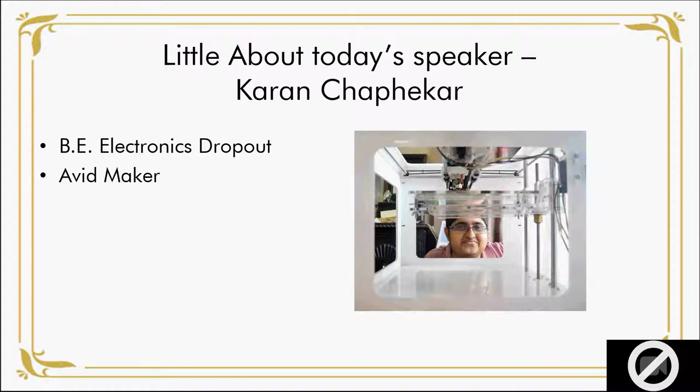A little bit about me - I tried to do my bachelor's of engineering, but I was not good at academics. So when I dropped out, I was doing these kind of projects. This is one of my printers.

So let me say what a 3D printer is. A 3D printer is an additive manufacturing method. In additive manufacturing, instead of taking a block of wood and carving it to make our object, here we are adding material to make it. And this technology is about 30 years old.

It was used by NASA also for some space shuttles. But why are we talking about it now? The reason is patents. The patents for this technology, which is FDM technology that we are going to focus on, where we put the plastic material using a mechanical system, expired in about 2009. And because of that, the project started - let's try to develop our homegrown 3D printer. So that was the concept.

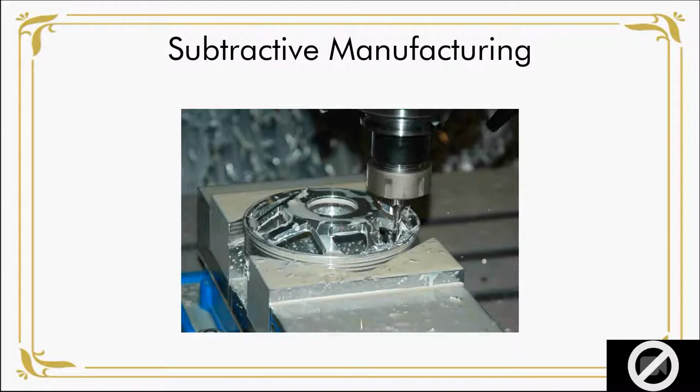So this is an example of normal manufacturing that you might know of, where you take the whole material and using a drilling machine, or what are called end mills, you try to make your part, whatever you want to make.

One more thing I want to mention is this whole project is not my invention per se - it's more that the implementation is unique for myself. This is a whole open source project. What an open source project means is the main files, whatever the software, whatever the hardware, are freely available. So you can also make your own 3D printer, because the community of 3D printing enthusiasts have come together to make this possible.

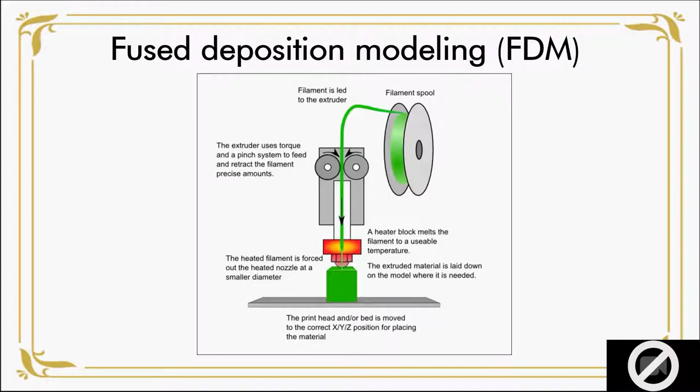So I'll just give a brief explanation of what's in an FDM 3D printer. You can see a filament spool up there. That green filament spool goes inside an extruder. An extruder is basically - if you remember the sugarcane juice, ganne ka juice, you can imagine when the cane goes in and the juice comes out - it's very similar to that. There is a heating chamber with a small hole where your melted filament comes out.

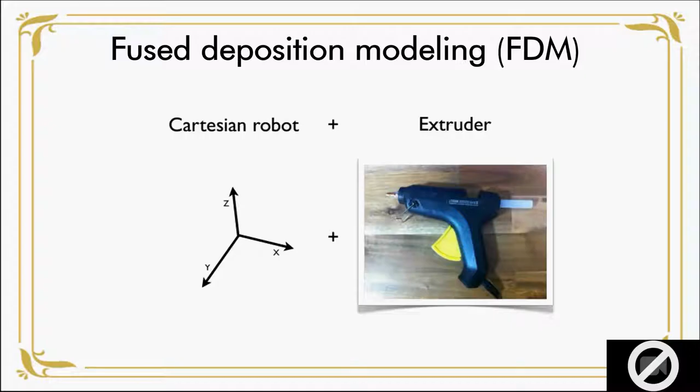The fused deposition modeling method is what we are using. We use a robot to move an object, and for the extruder, you can imagine it as a glue gun. So what we are basically doing is squirting plastic on a surface, and where the plastic is squirted is decided by our 3D printer. As one layer solidifies, we build another layer on it.

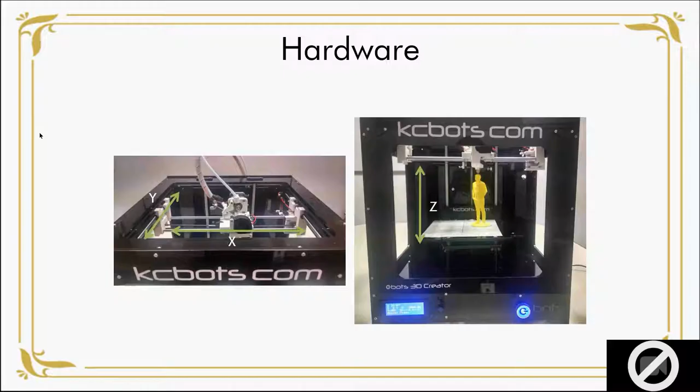So what happens? You require a 3D model to make this. A 3D model is not a photograph, you have to understand. A 3D model is made by, you can either 3D scan it, that's one technology which is not common. Another way is you just use AutoCAD-like software, and we are going to use another software called Tinkercad today to showcase it. With these systems, you can make whatever you want in 3D modeling.

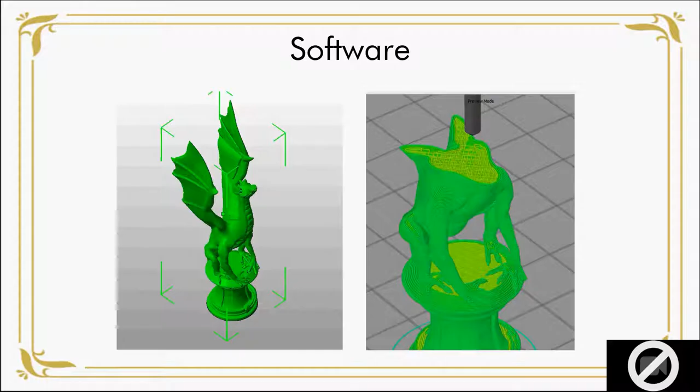It requires a little bit of skill, but once you are done with that 3D model, the software developed for this 3D printer can just take that model and recreate it with, I would say, 0.2 mm accuracy on the 3D printer. So what you saw on the left is the 3D model. On the right is what the software came out with. The software decided where to put the plastic, how to put the plastic, and after that you have this 3D print, which is the object that was designed before.

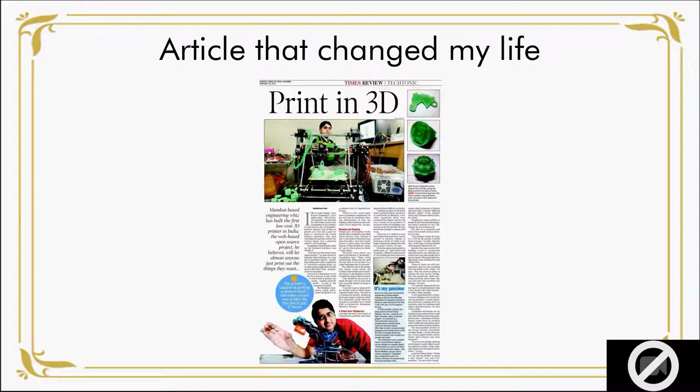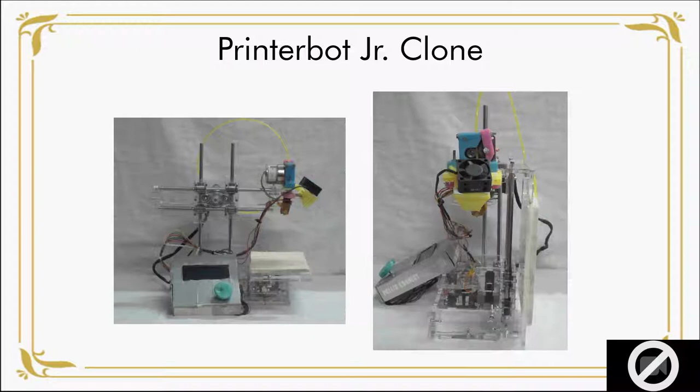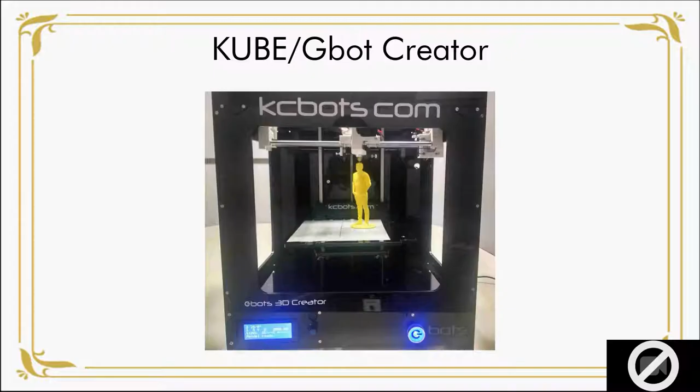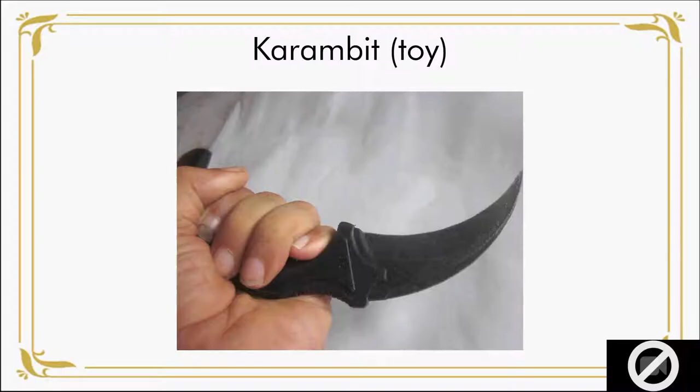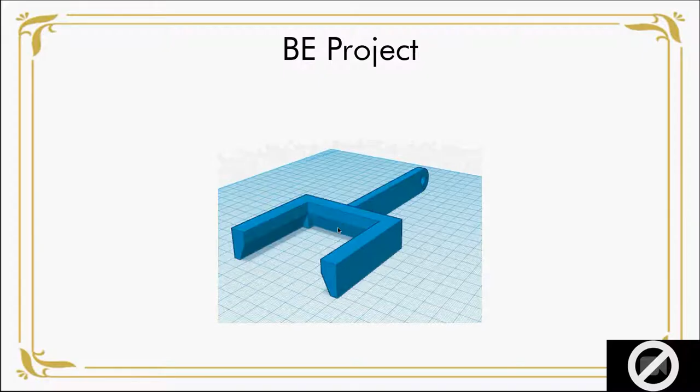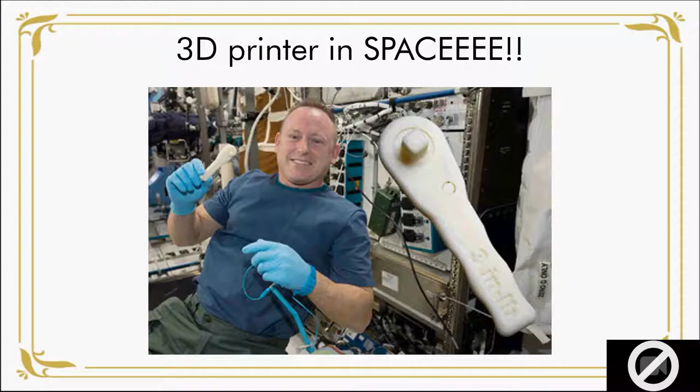One more advantage of 3D printing is you have to carry only the raw material. Imagine if you want to make a spanner for a specific specification. You would have to carry every spanner because you don't know what you will need. But with a 3D printer, I can just take a piece of plastic and print it wherever I want. So this is actually a wrench made in the International Space Station with a 3D printer. So the technology is very versatile.

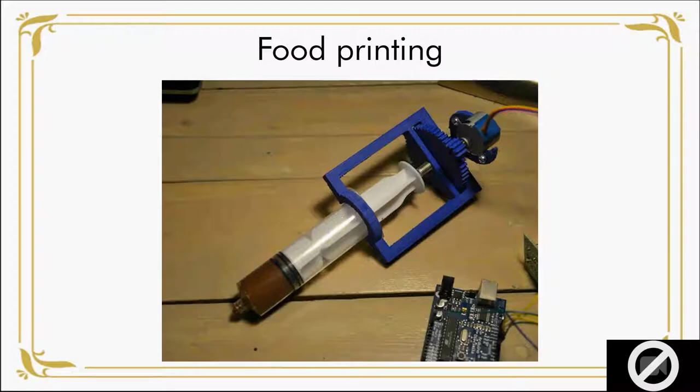So now with 3D printing we can extrude plastic, but we can extrude other materials also. So this is an example where chocolate is inside the syringe, and it is used to make a chocolate 3D print. So you can make a small toffee or chocolate in whatever shape you want, completely customizable. You can imagine these things in 5-star restaurants where you want something very customized, or high-end cafes.

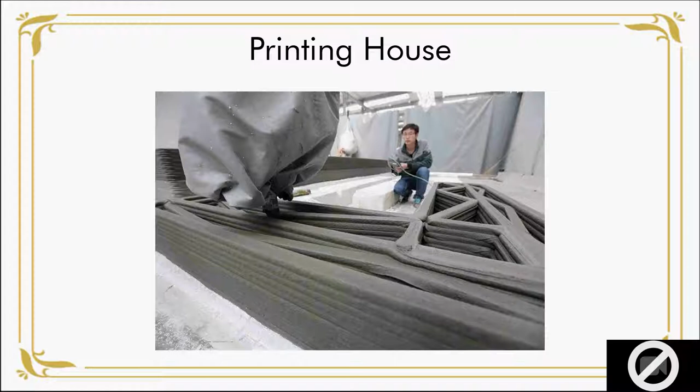This is another thing. They are 3D printing houses also in China. So this is a 3D printer which is depositing concrete layer by layer and making these houses in 24 hours. So you can imagine how fast you can do 3D printing even at large scales.

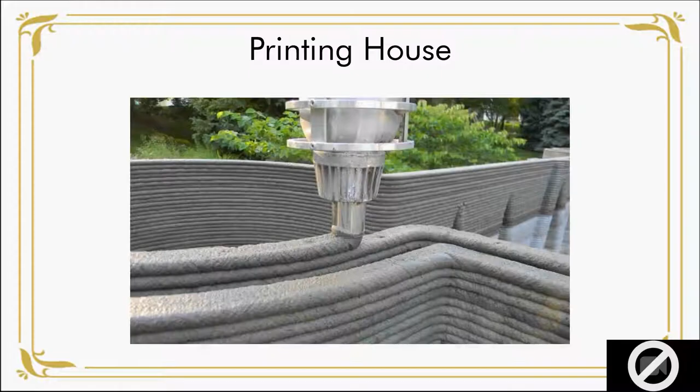This is another view. This was not in China, it was, if I'm correct, in America, and it was made by a father for his daughter, who wanted a princess castle. So he made a 3D printer which can work with concrete, and he made this castle out of it. So it's a very wonderful thing.

So for the demonstration today, we are going to go through the whole cycle of 3D printing, which starts with designing. We are going to use a website called Tinkercad. You can go and register yourself whenever you have free time. This website is basically a 3D modeling software, but you don't have to download it. It's online.

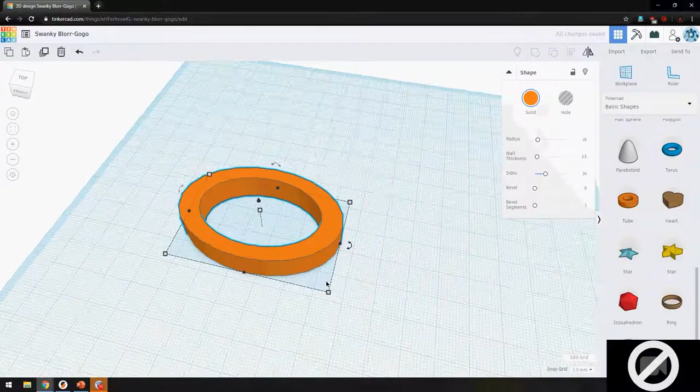On the right side you can see there are various shapes here, and you drag and drop these shapes onto this main page. You can zoom in, zoom out. You can change the size of this. You can put exactly how many millimeters you want, and you can make your objects out of this, and you can combine and subtract.

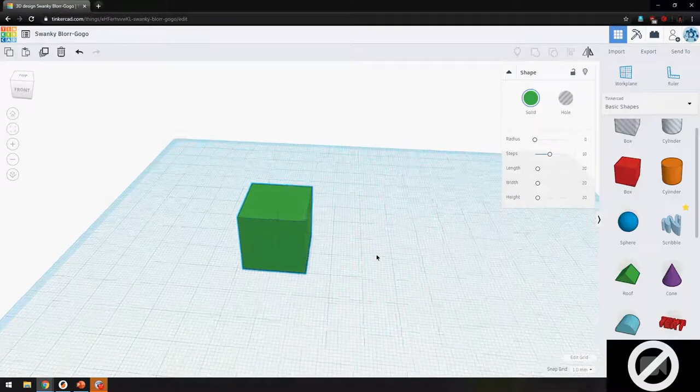So for example, I have this block. I can name it, I can color it green. The color here doesn't matter, because color is only for representation. Then imagine I want to make a small house. So this is a roof. I can keep this roof on top, select both of them, and click merge. When they are merged, they are now one piece. They are no longer separate pieces.

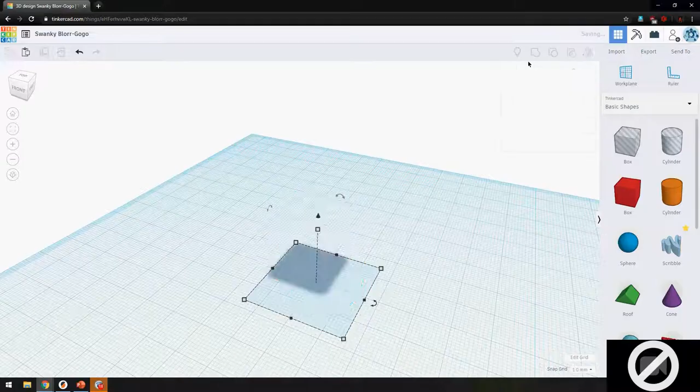Now on the other hand, we can take any other object, and as I said, I can change the color. So I can set the color as hole. Hole is, you can say, a negative. So I define it as a hole, and when I group this together, it carves the piece out from my main model.

You can see the spherical part is carved out. Okay, so using this method we are going to make a simple keychain. So what we are going to do today, we are going to take this text format. So we have this text, so we are going to type something here. So we'll write MSS.

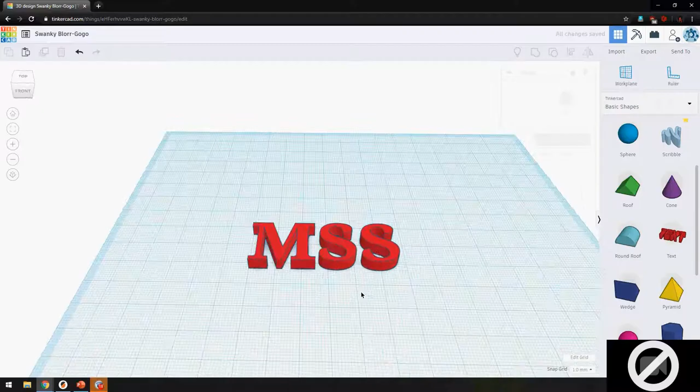And this text got its dimension, so it got a height of say 10 millimeters here, but because we want to print this model also, I'm going to decrease it to just 5 millimeters. Okay, so you can see we have made this text. Now if I go and 3D print it right away, it will create 3 letters MSS, but they are all separated. So they will be like letters used in number plates or something. So what we are going to do, we are going to take a box.

Hello, Karan? Yes? Sorry to interrupt. Actually, I think there is some lag between the screen that you are presenting and the voice. I would just request you to hold on, because right now the part where you were speaking of MSS to be printed is actually getting shown. Okay, got it. So I will go slow thoda. Thank you for feedback. And do keep checking the chat. Oh, yeah, I'm checking it actually on my phone.

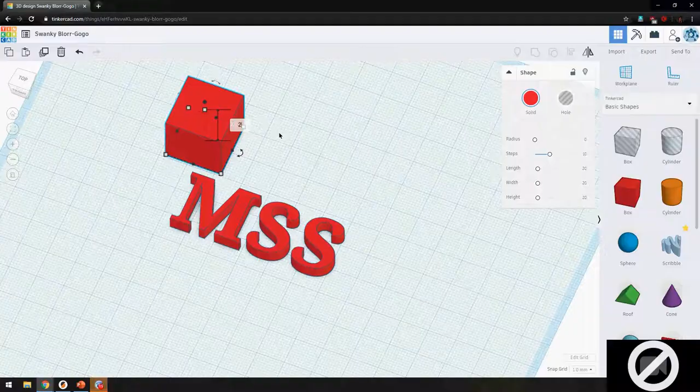Okay, so these alphabets, if I print them as it is, they will come separately. So what we are going to do, we are going to take a box. I have taken this box here, and I'm going to put the height as 2 millimeters right now. Okay, I will slow down a bit. Then let's color it differently.

Now we are going to increase the size of this box. We'll make sure that it fits this size. So if you can see it here, MSS is on this plate. Now when I print this, because of this plate, this will be more like raised lettering, or whatever is opposite to embossing.

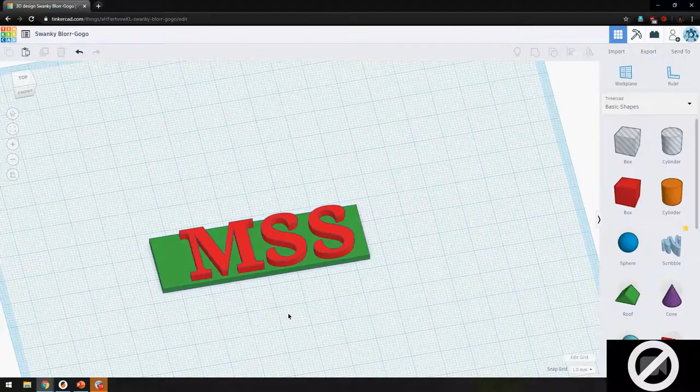As we are making this as a keychain, we require a keychain hole. So we are going to take one cylinder, and as I showed you before, as we can combine objects, we can remove them also. So I will define this cylinder as hole or negative cavity. I'm going to make it smaller.

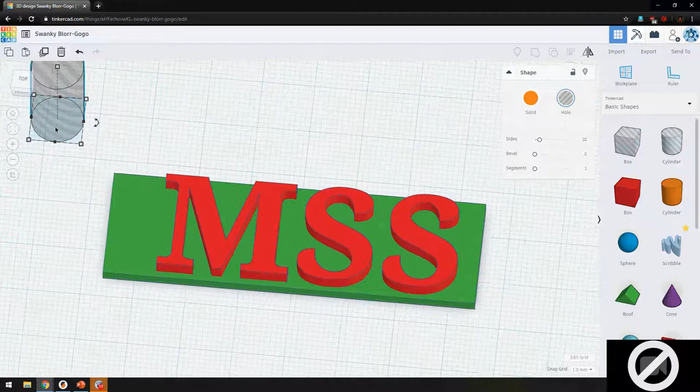Let's say 10 millimeters by 10 millimeters square. So I can type 10. I will zoom in so you can see it clearly. Now we are going to take this shape I made and put it where I want my hole. Okay.

So when I combine all of these three parts, which is our MSS lettering, the base plate, and this hole, it's going to make this into one object. But as you remember, we kept the cylinder as a hole. So it will just remove that part from my main model. So this keychain is ready. It's just a very simple design, and we are going to export it into a format called STL.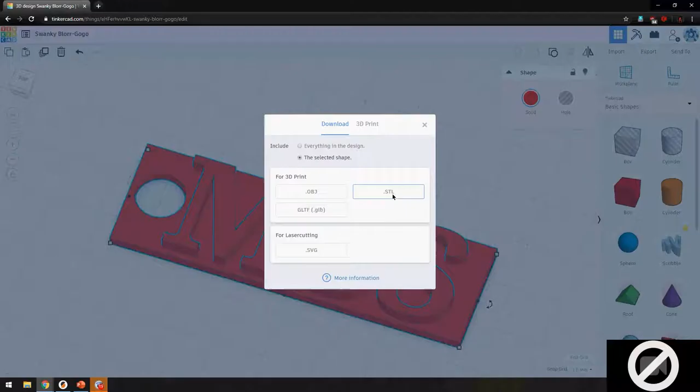So if you know Photoshop or CorelDRAW, you can export a file in a format called JPG. We are all familiar with JPG format. It is a very common format for our photographs. But once you have exported it, say from CorelDRAW, it's hard to edit it. Similar thing with the STL format: when you export it, you can't edit it easily. So I'm going to save this.

And now I'm going to introduce another software which we are going to use very briefly to convert this model so my 3D printer can understand it. These softwares are called slicers. These are specifically made for 3D printers only. What they do, they take a 3D model and convert it into a language that my machine can understand. I got a question. Yeah, you can use Blender also. We can use any 3D software. So we are going to import the file we just downloaded.

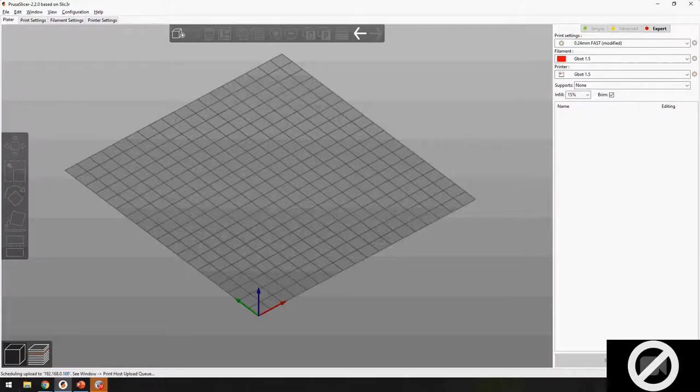You can see it here. So this square piece is the build plate of my 3D printer. So this is as big as I can make an object. There is a height limit also, but it is not shown here. So I'm going to just place this MSS in front, and there are a lot of settings involved in this. I'm not going to go in depth in the settings, but basically I select the settings.

Yeah, I will answer the questions afterwards. Okay, when we are 3D printing, I will go through the chat and maybe answer them.

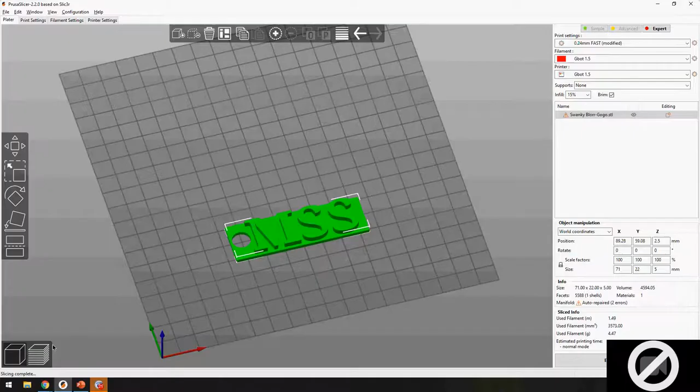So when this model is done, the software automatically slices it. The process is called slicing, and we can see the slicing view. So you can see here, if I zoom in, these orange lines are basically outlines of my object. So the 3D printer is going to draw those with molten plastic first, and then it is going to fill the red part. And if I go down, I can see how it's going to get printed.

Okay. So this is my bottom layer. This bottom layer is what attaches to my build plate. Then it goes up. So now the two layers are done. You can see this triangular pattern here.

When we are 3D printing, we don't actually print completely solid objects because it's going to be a waste of time and materials. So we tell the software that we want this percentage of fillness, or it's called infill in 3D printing terms. We have set it to 15%. So right now the object is filled by plastic 15% by volume.

As we go further, it closes our top plate and then goes for the lettering. So this whole print will be 21 layers and it is going to take 20 minutes. Now I'm going to send this file to the 3D printer. My 3D printer is attached to my Wi-Fi, so I don't have to connect it to my PC. In other 3D printers you require an SD card, but we are just going to send it to our 3D printer. Yep, it sends wirelessly and it starts 3D printing.

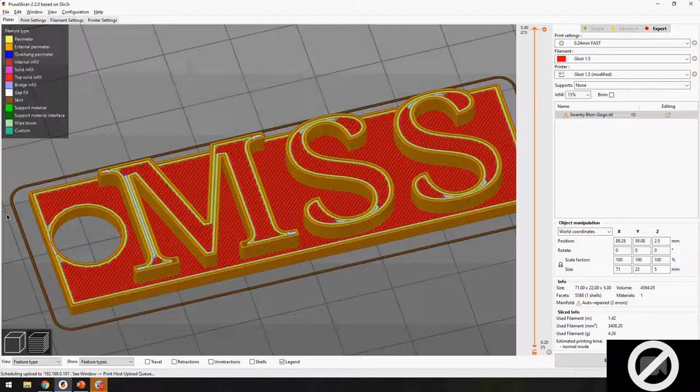Now I will show you another view where you can see my 3D printer's interface. This is something called OctoPrint. It's working on a Raspberry Pi if anybody is interested. It's basically a small computer on my 3D printer which makes its own server page, and I connect through that.

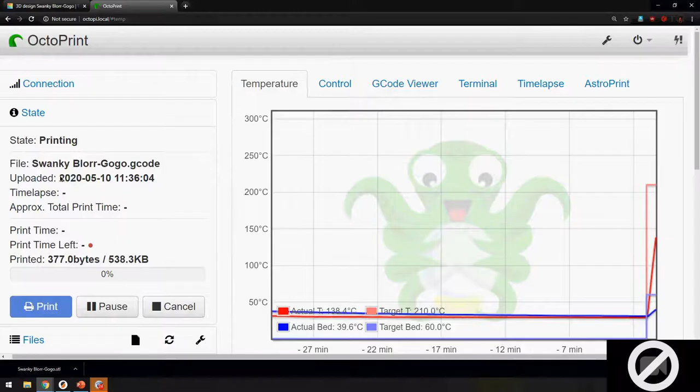So you can see here these graphs. Let's see if I can increase the size. You can see that our temperature is increasing. I told it to increase the temperature, and you can see this is the file, this is when it was uploaded, and this is the size. It's a half MB file. I can show you the G-code view.

Let me explain. This is basically a live view that shows us what is getting printed right now on the machine. After the 3D printer has started, I will move to my phone camera and show you the 3D print. Plus one more thing, I can show you right away. I attached a camera also, so I can monitor it from anywhere. It's connected to the internet, so if I'm somewhere else, I can connect to my 3D printer and see the progress. What you are looking at right now is the head of the 3D printer. Okay.

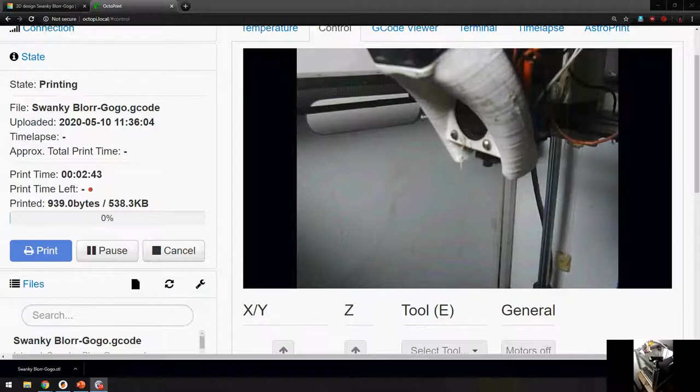Hello, Karan. Oh, sorry, I was on mute. I was saying, can I just stop the screen sharing right now, or should I? Yeah, that's what I'm asking you. Do you want to share anything on the screen while the demo is going? I don't want to anymore. Yeah, I will just stop it. If I require, I will ask you. Okay, no problem. Okay, I will stop it so they can access it properly.

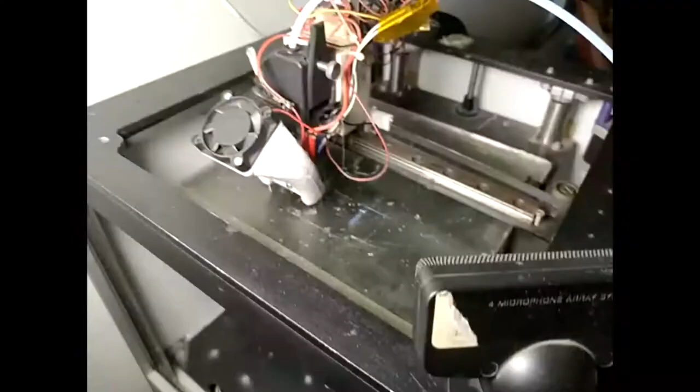So this is the 3D printer. Let me try to explain what is happening. On the back, these are two motors which are controlling this center section. So two motors in the background. What is happening right now is this bed is getting up. Now if you see, there is this filament going in. This is the plastic, so our object will be of blue color.

So this plastic is getting pulled here into this unit. This unit is then pushing it out, and right now you can see the plastic is coming out in blue color. I can show you from this angle. Wait. So you can see it's actually putting the plastic. I will keep it horizontal so it's consistent. I will keep it steady. There are a few fans also, to help the cooling of the plastic.

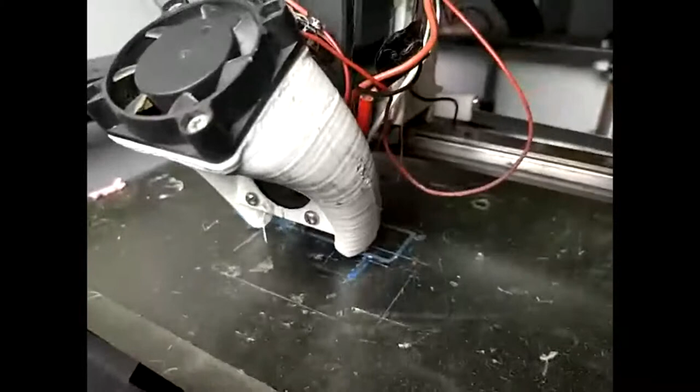The bottom layer is generally printed really slowly, because we need to make sure that it is getting stuck to the bed properly. So let me give you another overview while it's printing. As I told you, there are two motors in the back which help in the X and Y motion.

Then there is another motor which is inside this body, but is attached to this middle rod. You can see this middle rod. When it rotates, it's like a screw, and the bed goes up and down. Whenever one layer is drawn properly, the bed will go down a little, in this case about 0.24 millimeters, 240 microns, and the 3D printer will start printing on top of it.

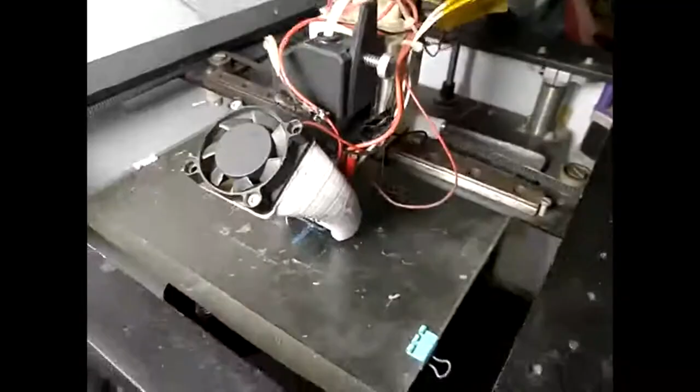Now there is another motor hidden inside this unit. This motor is doing the job of pulling our plastic. It's hard to see, but inside here there is a nozzle. This nozzle is right now heated to 200 degrees Celsius. Due to this, the plastic is getting melted and coming out of the nozzle. The nozzle's diameter is exactly 0.4 millimeters. With this information our machine will know how much plastic to extrude.

There is another fan which will turn on afterwards, like right now. So now the first layer is done, and the machine has also sped up. See, it's doing outlines first. Then it's going to start filling the inside part.

What we are going to do here is, when our base plate is done and it's time for lettering, I'm going to stop the 3D printer in the middle and change the filament to another color, so you can see the difference and how you can do multicolor printing. It's typical for a keychain. If you change it in the middle, you can see a nice contrast in the 3D print.

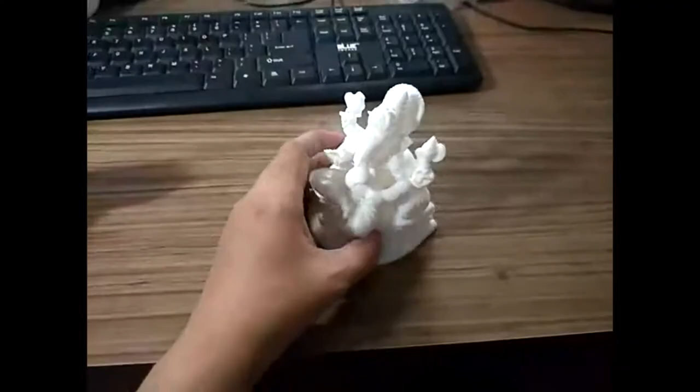Meanwhile, I would like to show some other 3D prints that I have. So this is a model of Ganpati. This was downloaded, and I think it was made by a method called photogrammetry. With this method, you take multiple photographs of an object, in this case a Ganpati Murti, and put them in a software. The software tries to understand how the model looks and converts it into a 3D model. The quality is not always good, but you can get a generalized idea.

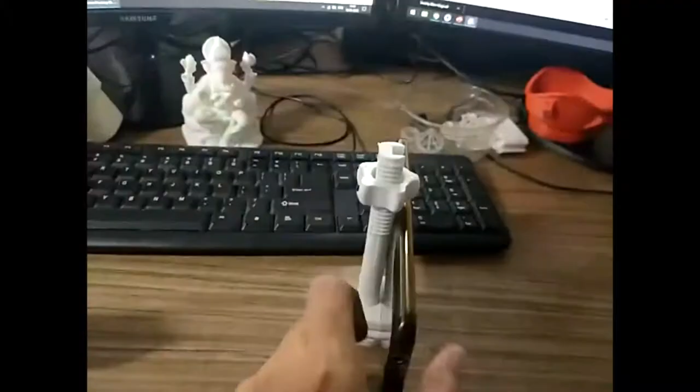Now another thing I was printing in preparation for this is basically a mobile stand for a tripod. I was printing one more part, so I could have used a phone stand instead of holding it in my hand. If you can see, there are these screws here. So this is a nut and screw.

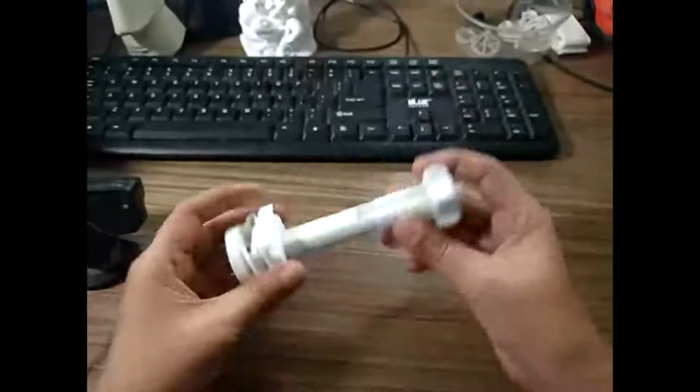So this is a nut, screw and bolt system here, and you can see how tight tolerances you can get, or how tight accuracy you can get.

This is another fun print. This is basically my glasses holder. Very simple 3D print, little fun.

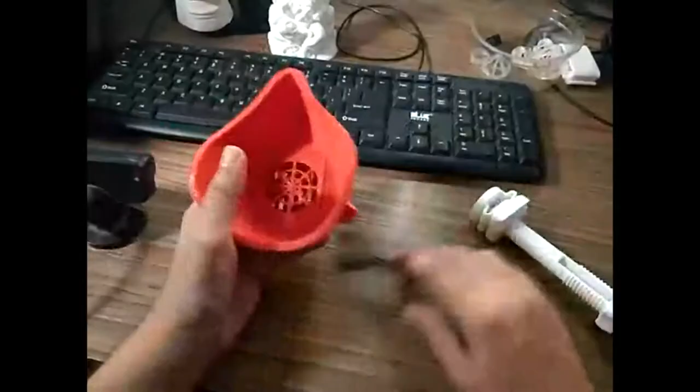So right now the corona pandemic is going on, and we are trying to make these masks so you can add filters in them, and the filter can be replaceable. This is actually an FDA approved design. So the advantage of 3D printing is I don't have to wait for a manufacturer to manufacture it, I can just make it my own on a 3D printer.

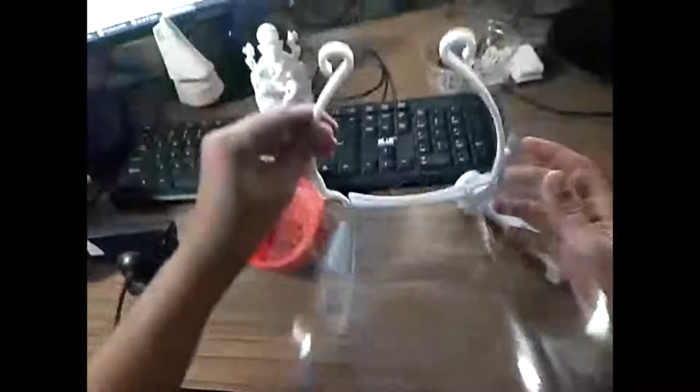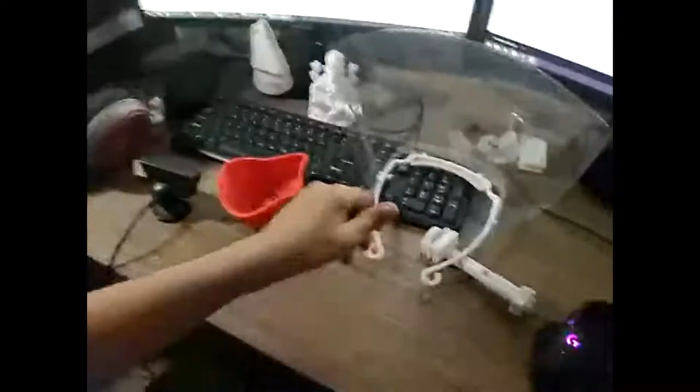Another thing we are making with a group of people called We the People, PPE. So these are face shields basically. I'll show you. This part is 3D printed again in 20 minutes, and this is a sheet. This is used by medical and police professionals, like an addition to a mask, so nothing gets on your eyes and skin.

Another simple object, this is a phone stand. Okay, the phone stand is broken, it's fine. This is, I like to make these kind of things.

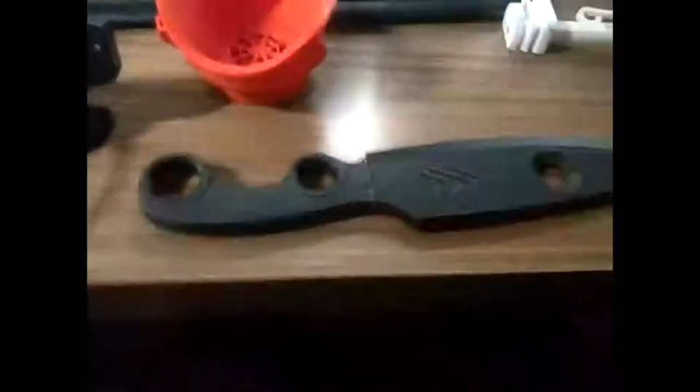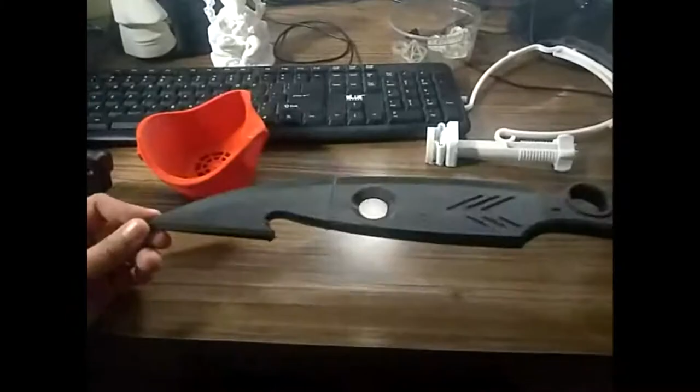This is basically a hunting knife from a video game called Destiny. I like to make stuff from video games and movies. So this is again a 3-part print. My machine cannot print this big, so I made the model in such a way that there were 3 parts, and then you combine them. It's a pretty big print, you can see.

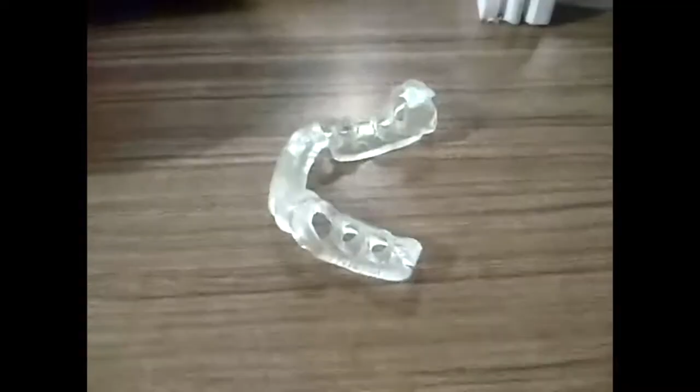Another thing I'd like to show, including this 3D printer, I was talking about another one, a liquid 3D printer, which can do very highly detailed work. This is a denture, basically when you are doing root canals or adding new implants. This is custom made, the doctors send me the file. They have taken a scan of the tooth structure and gums, decided where they want holes, and send this model to me. Now they are going to use it on the patient, using these holes as a guide for drilling.

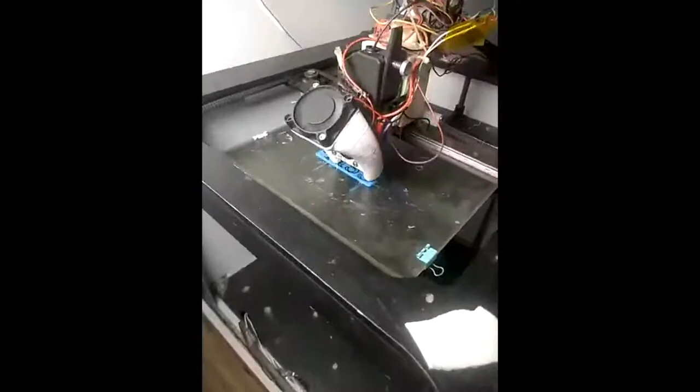Hello, can you hear me? Yes Karan, we can hear you, and we can see the printer also. In the meanwhile I changed the filament from black to blue, and you can see right now it is making the object now in blue color.

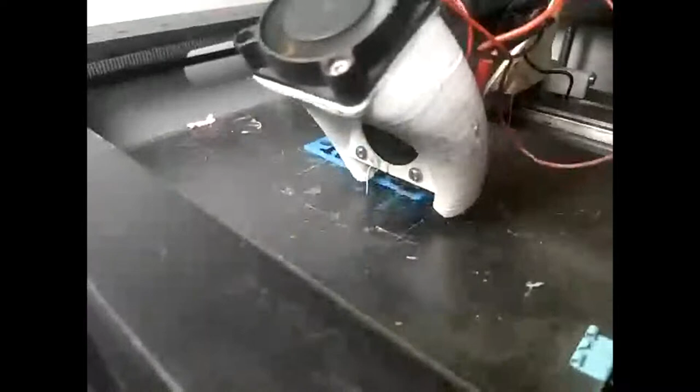Okay, so yeah, there is a lot of work going on to make human organs out of 3D printers. The idea, from what I've read so far, is making a structure out of sugar or some kind of material that our stem cells will require, and then stem cells will build around that object. Imagine a small sugar tube, and the cells will develop on them. They will eat the sugar, but then they will create a coating of cells. So yeah, there is some happening in biology.

In terms of edible, yes you can, there are chocolate 3D printers, there are sugar 3D printers. In the sugar 3D printer you can have colors also, because there is a small inkjet module on that, so it can have edible colors. So there are 3D printers like that. If you want to search, there's a 3D printer called Foodini, like Houdini with food, which is specialized in food 3D printing. But you can modify this 3D printer for simple chocolate 3D printing or cake decoration without any issue.

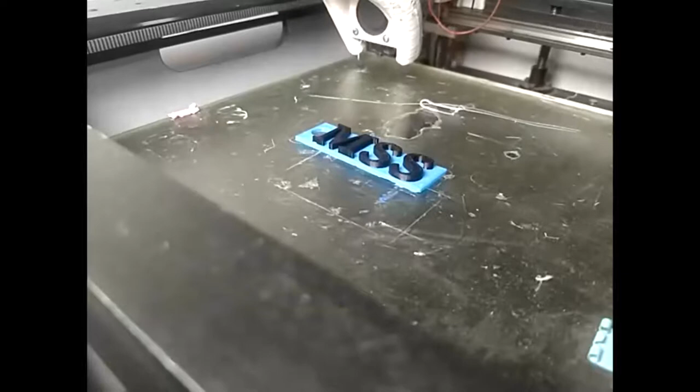Question from Karthik Pankaj Pathak: can we code our 3D printer using Python? No. What's happening on the 3D printer side is the board right now is an Arduino or Atmega based board, and the whole software is written in C or a version of C. So from Python, if you make a script to make a 3D model, yeah you can use that, but end of the day the 3D printer will require a G-code file, not another kind of code. I don't completely understand because Python is such a huge language. Actually, the slicer software you saw, older versions were Python based only.

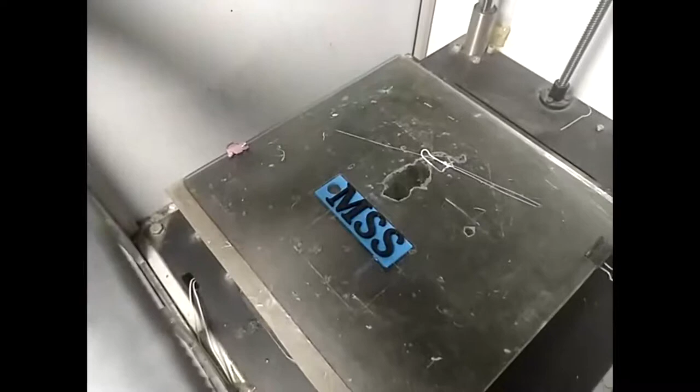Right now our 3D print is done, the machine has parked and the bed is coming down. I'll let it cool down and remove the print to show you. Yeah, next question.

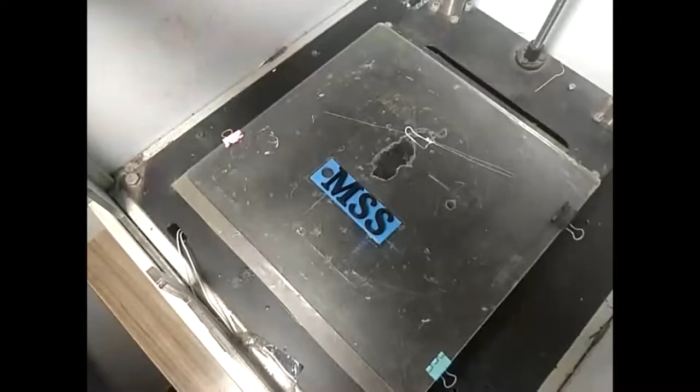Pranav Oak is asking, can Blender be used for both modeling as well as slicing purposes? No, Blender is only for modeling. For slicing you have to use some other slicer. There are various slicers in the market, I'd say 90% of them are free, only one slicer is paid. Generally when you buy a 3D printer — this printer is made by me so it's not available in market, but nowadays you can get 3D printers on Amazon for 15,000 rupees and it's pretty good honestly, not a bad 3D printer at all — the software comes by default, and when you go on the internet you'll find various different software options.

Mr. Sadekar is asking whether 3D printing can be done with only plastic material. Yes, right now the printer you're looking at is only for plastics.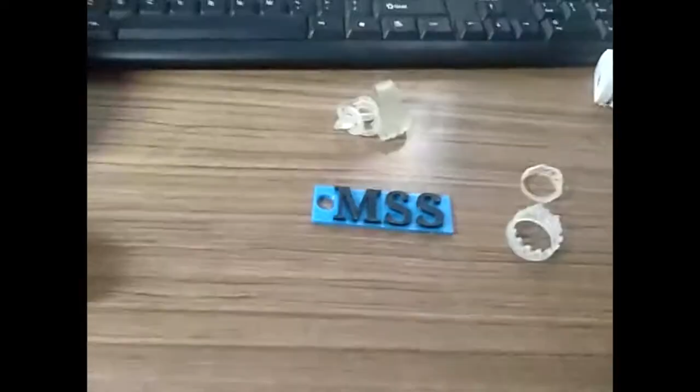But yeah, only for plastic. But this plastic is actually not even oil based. This is a corn based plastic. It is biodegradable, but not like a PETG is recyclable; this is biodegradable, not at the high grade but at a low grade. So it takes more time to disintegrate.

But because we need certain properties in the material, unfortunately plastics are the only thing that can provide this. But there are materials like, for example, I have a wax filament. So instead of plastic, it's wax. I got it from somewhere in the USA, I don't remember. But yeah, you can print with wax, and there are some materials like that.

It takes this PLA material and they add little powders of brass or stainless steel. I have actually made a nylon plus carbon fiber, which is very strong. So there are these composites available, but the base will be mostly a plastic.

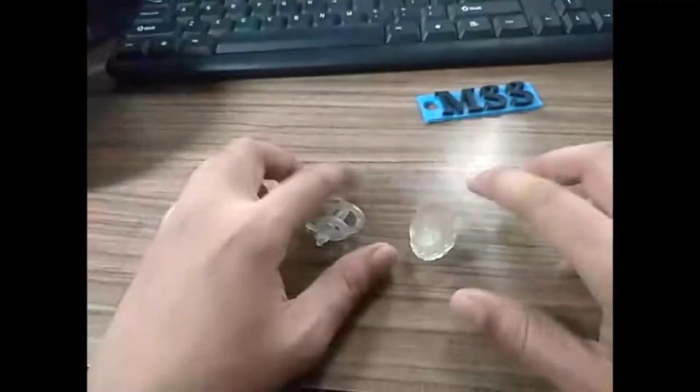Okay, Abhishek is asking how does the finishing touch depend on the plastic material used? Okay, so regarding finishing touch, I'd like to mention again, you can see these liquid 3D printer prints, they are very fine and very smooth. You can't see layers because each layer is about 0.02 millimeter. So you can see the detail.

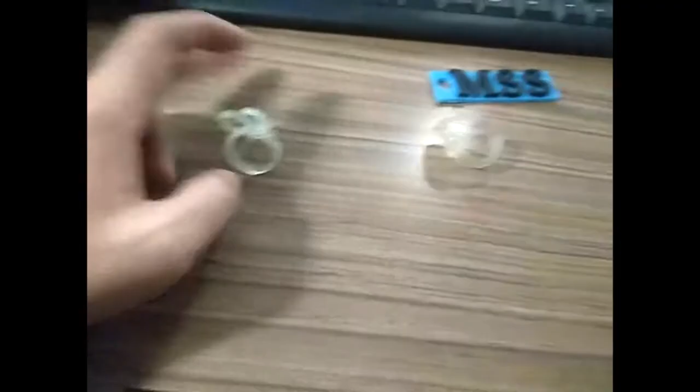You can see the detail in this snake ring. What I'm trying to say here, this is high detail stuff. Here each layer is made out of about 20 microns or 50 microns, which is 0.05 millimeters. So here you have an amazing finish, because this was a liquid when it was made. Now this plastic, depending on what plastic you use, there will be a difference.

So PLA and ABS, the most popular materials to 3D print, give relatively good results. For example, you can see the sides of this Ganpati statue, it's pretty smooth. But if you want to paint it, then you need to add a little bit of spray primer on this, and after that you can paint it.

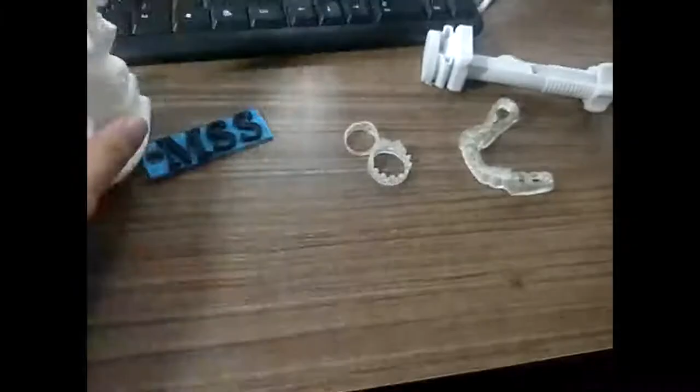But there are some materials like nylon. Nylon is used for 3D printing, but nylon doesn't print well. There will always be some problems with nylon. But nylon prints generally are not for looks, they are for function. Because you have to understand a 3D printer is not only about making these statues; you can make actual functional parts.

Like this white part here, and this part, some parts here, these are 3D printed. So as they mentioned initially, you can make a 3D printer out of a 3D printer.

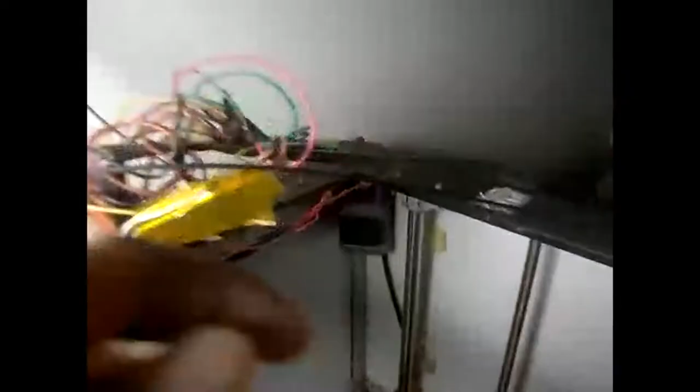Okay, so to repeat myself, many of these parts, like this part, are actually 3D printed. I can show you other parts here. This yellow spacer is 3D printed. When I built my first 3D printer, most of the parts were 3D printed. I won't do presenter access, but I will quickly show you my first 3D printer's design.

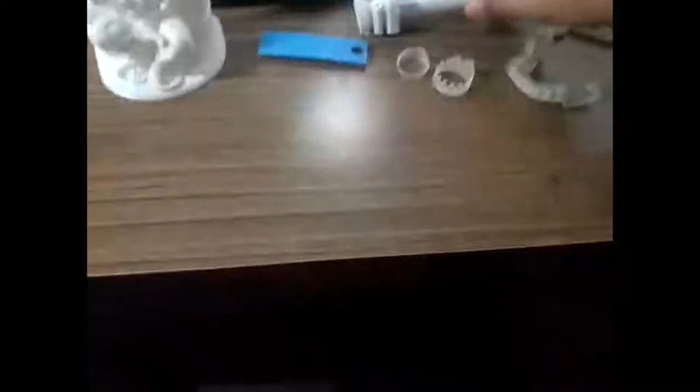Okay, two more questions from Satish Patankar. Do we have different printers for different final products? Are they convertible, and what is the cost of the printer that you are showing right now? It's a big question. Okay, so let's go step by step. First of all, let's go for the price.

This printer I built for around 40,000, but a lot of R&D has gone into it, and generally I don't sell them anymore. We sell a different version of this to schools, with a warranty and everything. Right now I'm not in the manufacturing business, but before lockdown we were planning to make a very cheap 3D printer that is good and made in India. So yeah, we are working on it.

So right now this is 40,000. If I'm getting the other question, it was different types of printers for different kinds of finishes, right? Am I correct?

For different final products, are there different printers? Yes, it depends on what the final product is. So if it's jewelry, you will go for a resin printer. If you need hardware pieces fast, you go for FDM printers. If you want them strong, then you use materials like ABS or PETG. If you want them flexible, use a flexible filament. So it's a combination of materials and printers.

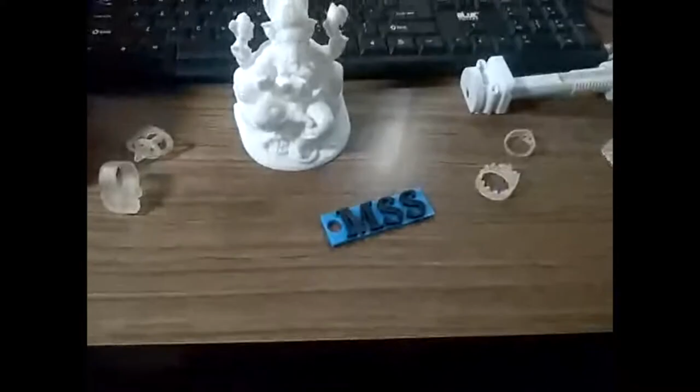And one more important thing, we should not look at 3D printers as mass manufacturing at all. This is the mindset we need to move out of. Let me explain. I have this camera, a Sony PlayStation camera. The shell of this part, if I go for 3D printing, will take me 3 hours. But in their factories, this is made in like 5 seconds. So you should not look at 3D printers as manufacturing.

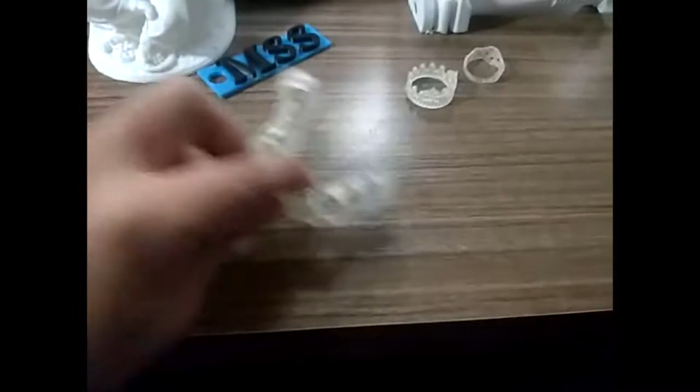What you can do is, if I want to make this with a custom name on the back, or I want everything in a different color, then you think about 3D printing, where customization is key. For example, I cannot make this in normal manufacturing because each person's teeth structure will be different. You generally need only 1 or 2 of these pieces. Or talk about custom jewelry. In that case, you should look at a 3D printer as a prototyping and customizable tool.

Like if I want to make this keychain in the conventional method, I have to take at least 5,000 or 10,000 minimum orders to make it in a mold, and the mold will take another 25,000 to 30,000 rupees. But here, the material cost: I took 4 grams of plastic, which is 3 rupees, the cost of this keychain. I don't have to put that much investment, and the turnaround time was much faster. So for prototyping, 3D printing is perfect.

One more question. In case of architectural models, does it require a 3D model from architectural software, or are detailed AutoCAD 2D plans with all dimensions and heights enough as an input? No. If you have a 2D model, it won't be enough. You want a proper 3D model, so you have to use AutoCAD, or let's say SketchUp, another old software which was once owned by Google. You need a 3D model to do that.

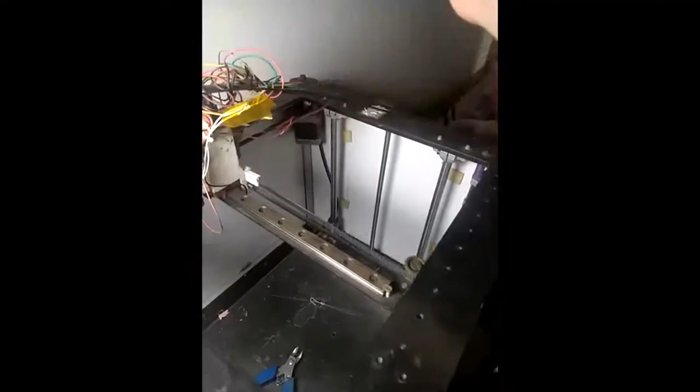that. So I would say the current best method is something called a tool changer. I will just show you. You can see there is one extruder here. In that system there are like four extruders kept here. The machine goes and picks one of them. Each one already has whatever color filament or different material loaded. So the machine goes there, picks that up, prints with it. When that is done, it parks it and then picks up the new cartridge.

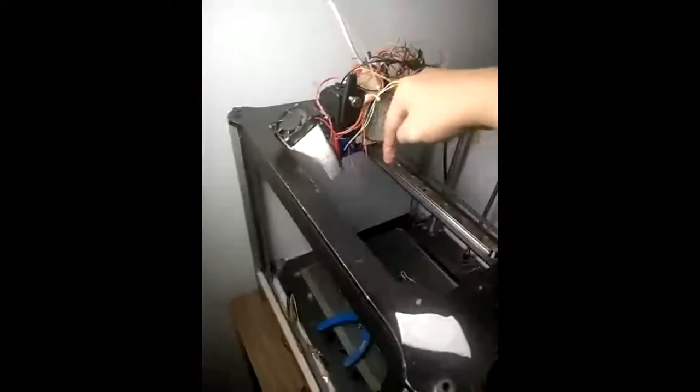It's called a tool changer 3D printer. You can Google it. It is developed by E3D. It is in Europe. It's not a final product right now. It's very much in the prototyping stage because people are doing beta testing for it. But I think that is the best method to do multiple. So yeah, you can have multiple of these units, but imagine if I add four of these units, I can't move much here. So something like a tool changer method.

There is another method where you have a Y splitter here. There is a filament going here from there, and instead of the motor being here, it's at the back. So it can actually pull one filament and push another filament. I have tried that myself. It's not easy to calibrate at all. It's not reliable. But this is called multiple extruder or multi-material 3D printing. It is getting common, but people still think FDM is a technology where you should not do this. It is not made for it.

Yeah. So I think I've covered almost all the questions. That's it for the questions. Okay.